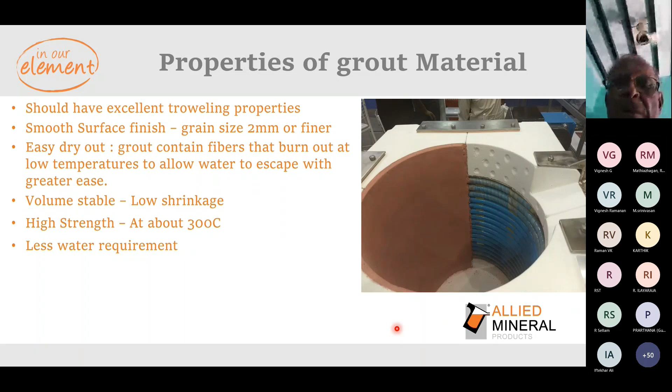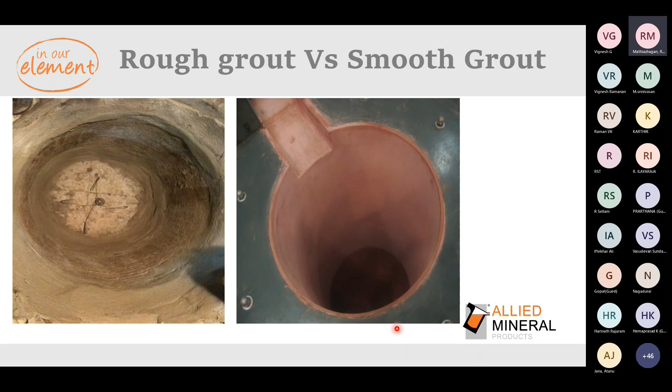When it comes to the dry out of grout, drying of grout is one important step when you try to maximize the refractory lining life. We recommend doing the dry out either by flame or power burner, which is most preferable. Heating through a halogen lamp is not recommended, even though commonly everyone follows this.

So we don't recommend drying grout with a halogen bulb. We recommend following the cycle recommended by the refractory supplier with the help of a thermocouple. This will help remove the complete moisture from the system in a slow phase. The dry out cycle can be designed based upon the size of the furnace and the amount of grout material consumed. Normal recommendation is to raise the temperature till 300 degrees Celsius.

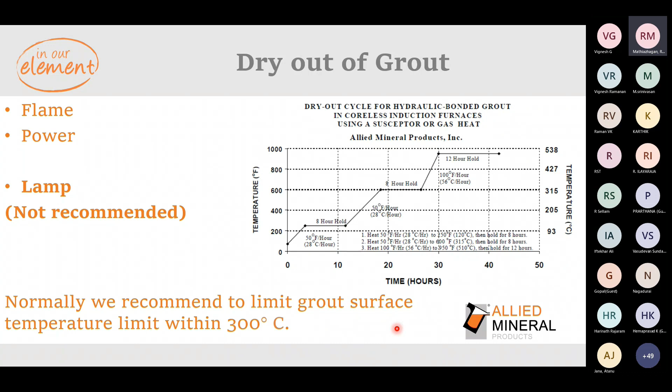So you can see a small graph on the screen, which is a common thing, but we can adjust this. We can frame this based upon your furnace size and the material that has been consumed.

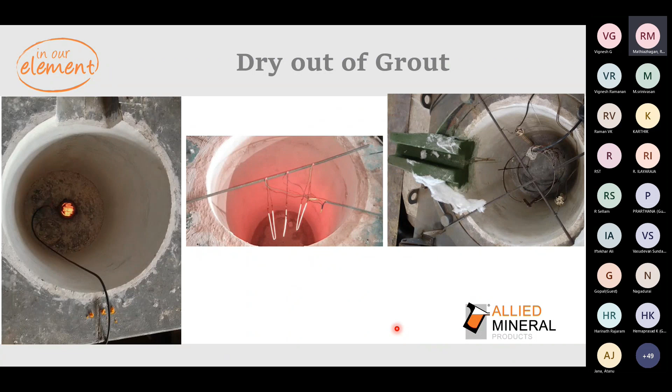So these are some pictures which show how we suggest normally a grout has to be dried out with the filament heaters.

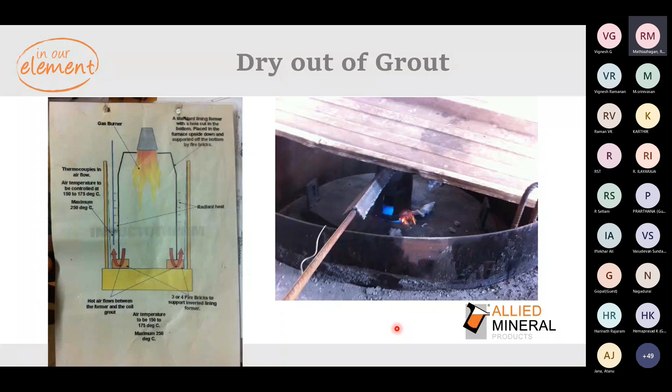So in this slide, we talk about the dry out of a grout through a burner system. As you see in the slide, place the former upside down by placing a brick at the bottom, so the former will be standing over the bricks. Place the burner in such a way that the flame is inside the former and the hot air flows through the bottom and moves upward between the grout and the former. Place a thermocouple through which you can detect the temperature and control it.

Some people go ahead with GLD values also, which is again a good thing. You can record the values before the dry out cycle is started and after the cycle has been done, to correlate the values and proceed with the lining.

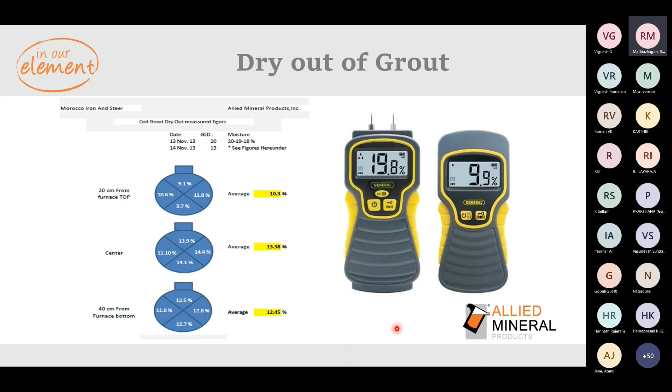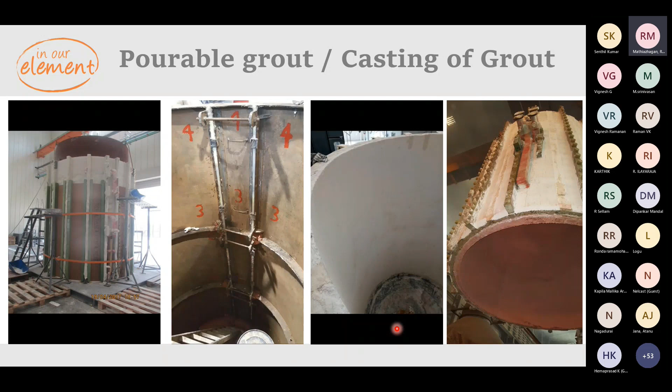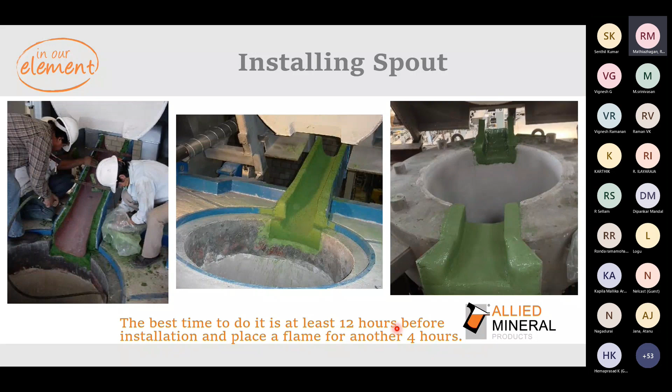Now I'm moving on to spout. We always recommend the spout be done prior to the working lining. This will help the main lining expand and contract with no hindrance. This will reduce the maintenance in that area and avoid metal penetration happening below the spouts.

As I said earlier, if the spout is done after the working lining, when the expansion and contraction of the main working lining happens, there will be a crack between the spout and the main working lining, which paves a way for the metal to penetrate. So always do the spout first.

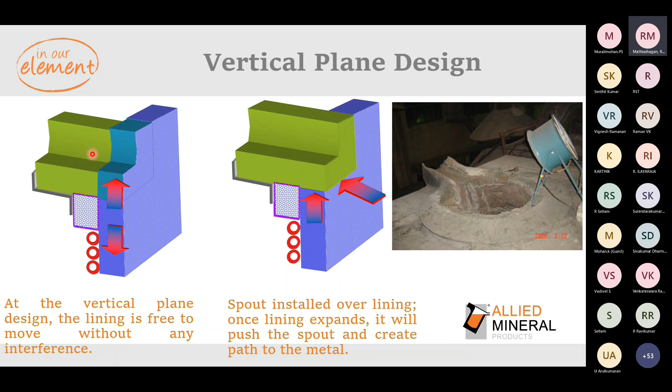So we recommend doing the spout first and then doing the working lining. You can see when we do the spout first and the working lining second, the maintenance is very minimum. We always recommend plastic refractories for the spouts, which has 2% moisture.

So prior to the working lining, we need to remove this moisture and allow the refractory to shrink. We recommend using an external burner, and depending upon the quantity of the refractory being used, the dry out of the spout timing can be scheduled between 2 to 4 hours.

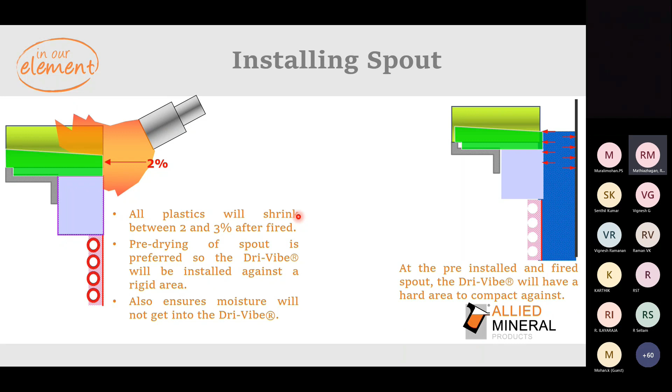Make sure you make vent holes for the moisture to escape easily.

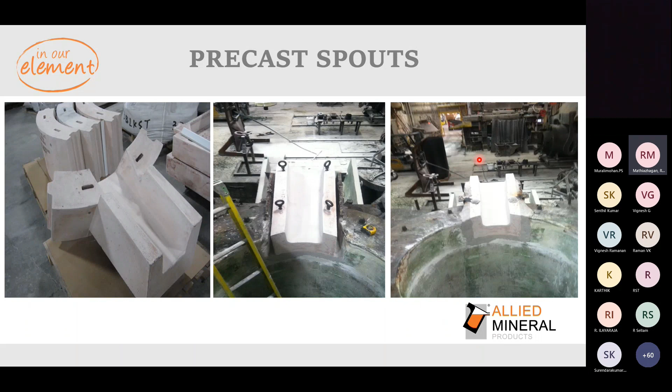Coming to top cap, this is one area where we have seen widely in the market least importance given till date. People normally go with sodium silicate mixed either with the ramming mass or with the sand, and they make the top caps generally, where high maintenance is required and a lot of unsafe operations are happening because metal leaks around that area.

So we talk to the customers in such a way that attention needs to be given in this area also. When we are talking about top cap refractories, it can be either dry, wet, or plastics.

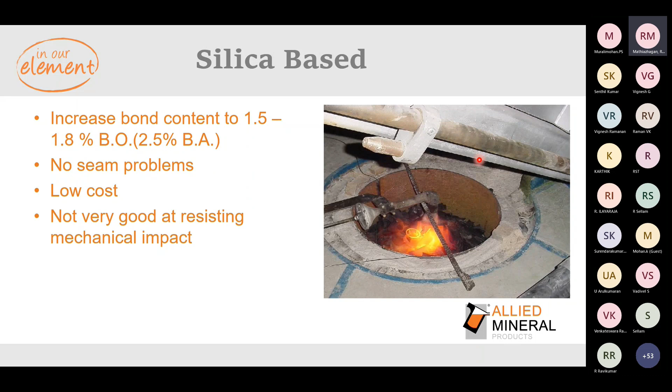For silica, we engage all the above said, like plastics or castables or dry versions. This is one type, silica based, where we increase the bond percentage. For example, if you're using 0.8 or 1% boron oxide for the main working lining, the top caps can be done with 1.5% BO or 1.8% BO, so that this product sinters a little bit at low temperature and gets the strength. This is one more silica based top cap material with extra bond.

We normally recommend a few silica based options on the top to have good volume stability. With the extra bond, under low temperature it sinters very fast and gains strength. Even if you have any mechanical abuse, it can be resistant towards that abuse. And as I said before, it's ideally suitable for silica linings.

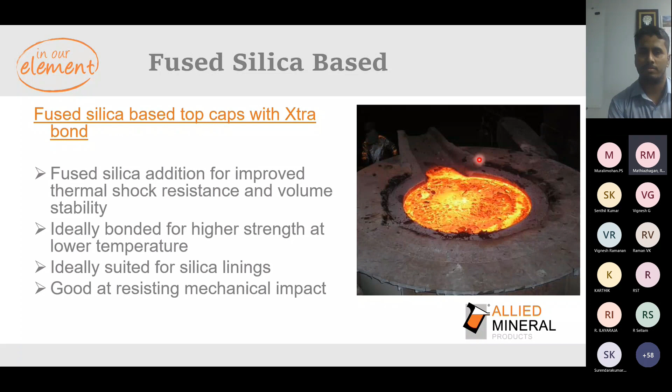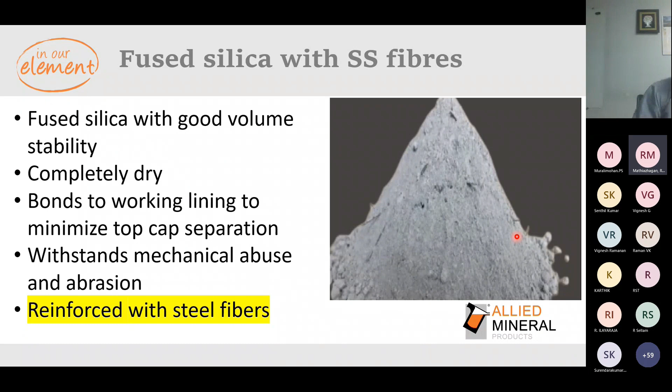All these dry versions minimize the separation between the main working lining and the top cap material. We recommend this product wherever there's more damage to the top cap area. These SS fibers act as needles to give more strength, and it reduces the amount of cracking and damages happening in that area.

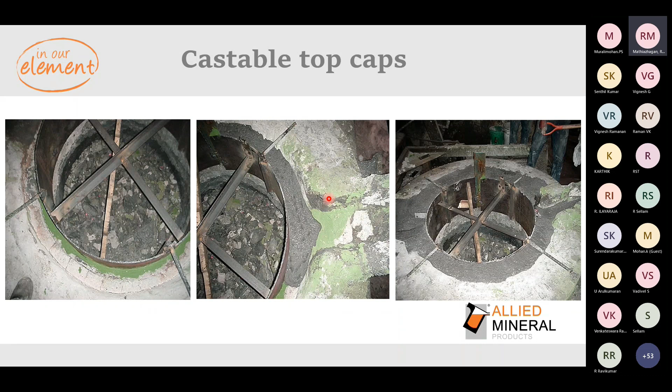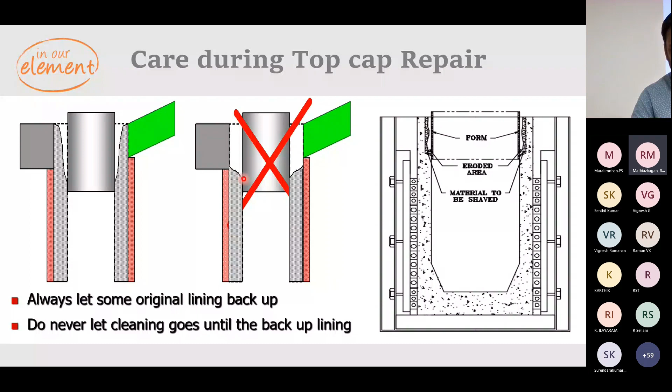Also, try to do the cut in the refractory inclined like this, don't do it on a right angle cut. You should always have the cold face on the upper side and the hot face a little bit on the lower side, then do the patching. Because if any metal penetration happens, the metal will have to travel up and then go towards the coil, so it will take some time. By the time it happens, we can have a GLT detection and we can shut down the furnace. So don't do a right angle cut like this.

These are two different products, two different product lines, and the merging will not always be proper. There will always be a small seam line separation which gives way for metal to penetrate inside. So we always recommend a dry top cap, like fused silica based or normal silica based with high percentage boron oxide, or fused silica based with stainless steel fibers. We ask customers to avoid sodium silicate top caps since they don't have good strength and require a lot of repairs during the campaign.

If you have high mechanical abuse, we can go with ultra low moisture castables as a top cap material. But do this castable lining when the furnace is in warm condition, so the moisture is not absorbed by the dry ramming material at the bottom. Also, whenever using a different top cap material other than dry top cap material, make sure the metal level is always on the main working lining and does not come to the level of the top cap material.

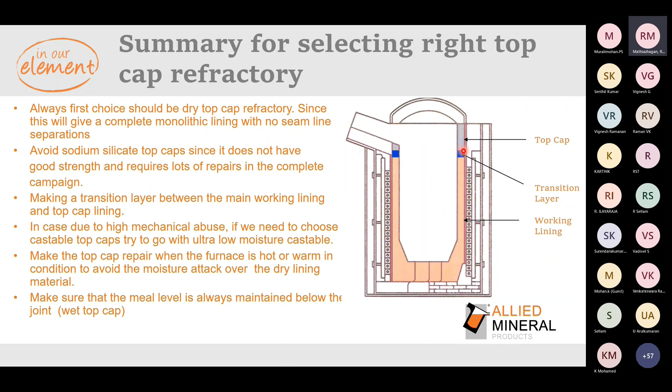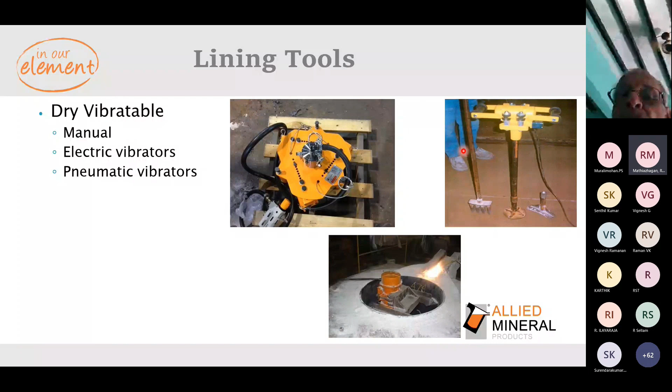Coming to lining tools, lining is normally done either manually or using a pneumatic vibrator or an electrical vibrator. The first picture shows a pneumatic one. The second is a Bosch, operated electrically, but manpower has to be engaged. The third picture, the orange motor, is an electrical vibrating system. But in general nowadays, most foundries are engaging the Jolter, the pneumatic one.

I'd like to bring everyone's attention to operating this tool. First, this tool should be used only for compaction, because I've seen in the market people use this for de-airing also. They don't do any forking - they just fill the material, introduce the vibrator inside, and start the vibration. But this motor is designed only for compaction. So we recommend forking the material for at least 5 minutes for each layer, and then introduce the vibrating motor and start the vibration.

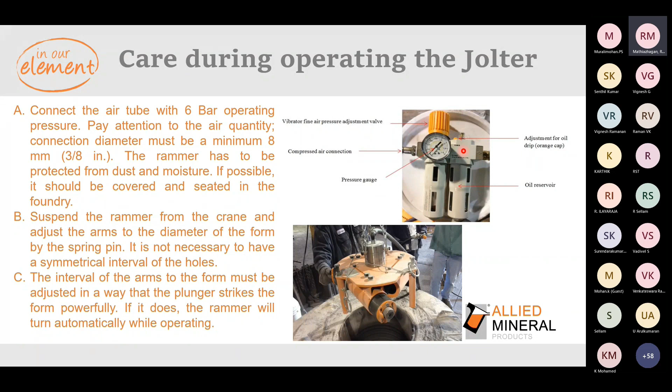Care which has to be taken while using this vibrating system: it should be operated at 6 bar pressure. Pay attention to the air quantity - use a minimum of 8 mm hose for the airflow between the compressed air and the system. The rammer should be dust free, because it has a lot of moving parts, so it should be dust free.

Adjust the arms according to the form diameter. Make sure the vibration is happening properly with a vibro tachometer. Use a vibro tachometer to understand the vibration and make a point to note it down, so that every time you cross check it, and if any deviation is there in the amount of vibration being transferred, you can check your vibrating pneumatic vibrator or jolter.

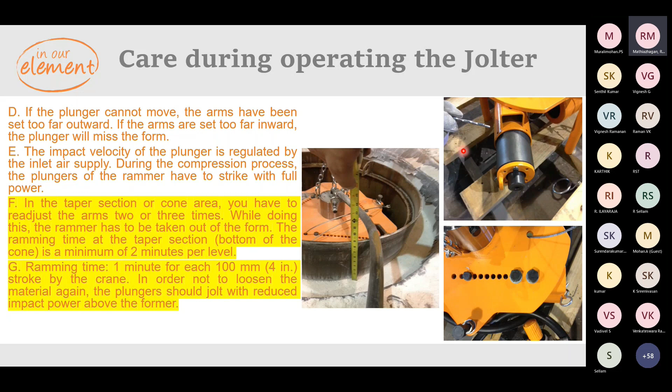In the taper section, ensure the distance between the former and plunger are adjusted properly, and run the vibrator for 2 minutes per level, because normally this has been uplifted by the crane. So at each level you have to do 2 minutes. For sidewall, vibrate for 1 minute for each 100 mm thickness or distance. Ensure we don't over-vibrate - set the level and vibration speed accordingly, to avoid disturbing material which has already been compacted.

So coming to the advancement in silica lining - I don't want to put my trade name, so I generally call it ALGT, which is Advanced Large Grain Technology. This is a new grade of silica in the market. It's not exactly new, it's been there for many years, but still very few customers have a mindset on how this will work.

So I take this opportunity to explain this and its advantages. Normal grain sizing is 4.5 mm to 6 mm, but this product contains 12 mm on average in a bag. There are certain grains which are a bit bigger, but on average it comes to about 12 mm particle size, which is about 60 to 100% larger than the maximum grain size of a traditional silica.

What the increased grain sizing does is reduce the surface area exposed, and this is not only a boron oxide - it's a special binding agent, so that the larger grains are kept on hold during the sintering process. So it has a special binding agent. This new binding agent with the grain sizing gives you a better sintering process and helps in attaining a better hot phase.

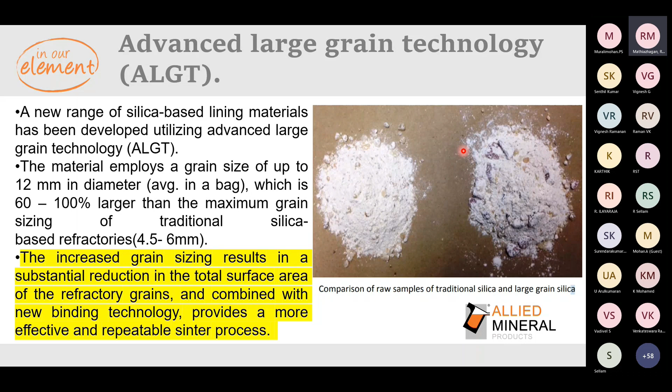So when it comes to the additional benefits, a better packing density is being attained because we had some cases where we removed the former even without introducing any kind of heat. We don't normally recommend it, but there was one customer who did it. The idea of sharing this is that this product compacts so well that you can remove the former also, but normally it's not much recommended because it's unsafe.

This product has been designed to be suitable for liquid sintering, and because of the grain sizing and grain distribution we have, it has improved abrasion resistance, especially in areas like taper section or cone sections where you find a lot of elephant foot erosion.

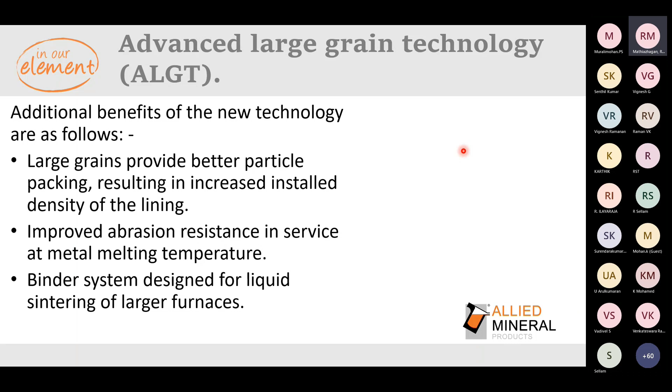So let's talk about sintering. Normally people tend to go with a kilowatt basis, but we always say that refractory understands only temperature and time. So try to follow the sintering with thermocouples and not by kilowatt, which is power. A K-type thermocouple does not cost you much, and when you remove this thermocouple at 1000 degrees Celsius, 1000 degrees Celsius is the critical area for the sintering of silica. These thermocouples can be used on a long-term basis if you're not going to damage them by keeping them in for too long.

So when it comes to types of sintering, there are two types: solid sintering and liquid sintering.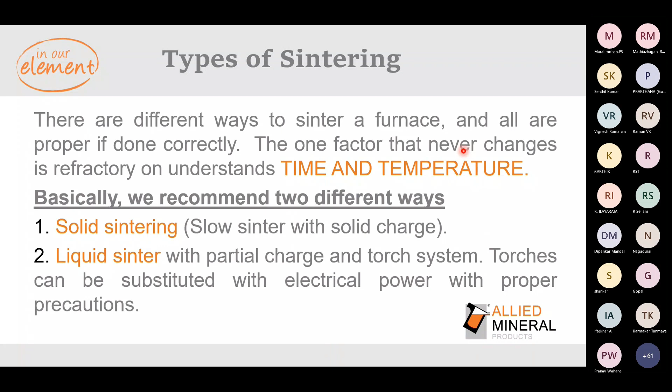If you talk about solid sintering, everyone does the same operation: the furnace is charged with scrap, and the sintering is done through power. Our recommendation is to rise between 83 to 100 degrees Celsius per hour, depending upon the furnace size. Hold at 550 degrees Celsius for 30 minutes, then rise till 900 degrees Celsius and hold for 1 hour. Then you can increase the power, melt the scrap, and take it to 50 degrees Celsius above your tap temperature, which is normally between 1550 to 1600 degrees Celsius, and hold there for 1 to 2 hours, depending upon your furnace size.

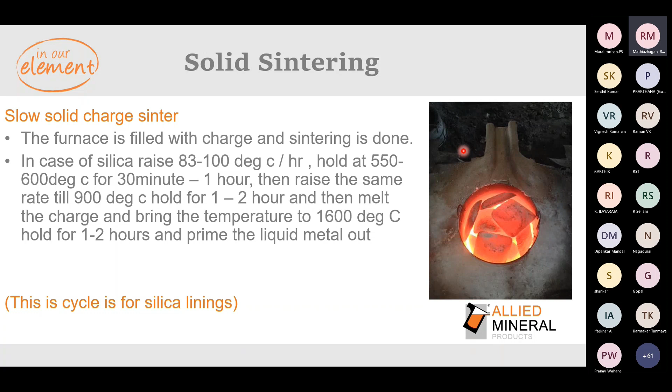That cycle is normally used for silica linings, but when it comes to alumina linings for steel melting applications, we suggest going between 200 to 220 degrees Celsius per hour, and then you can directly shoot out to 1600 degrees Celsius and hold. In case of larger capacity crucibles, you can hold around 870 or 900 degrees Celsius for 1 hour.

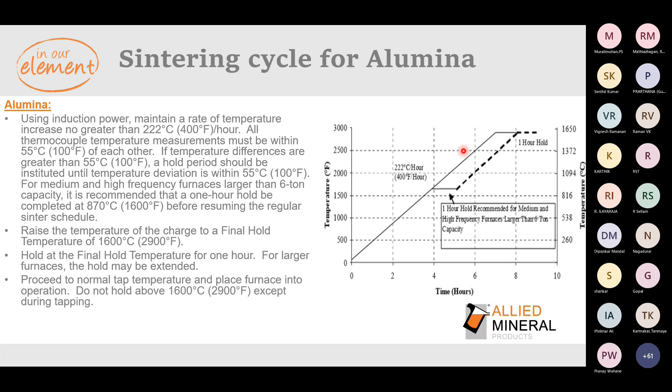When it comes to liquid sintering, this is one of the best sintering practices, but many people are concerned about engaging this into their operations. It's very safe if you do it in a proper manner, and it gives a longer lining life for your refractories. We recommend loading 1/3 of clean scrap inside the form with the help of a gas torch. Raise the temperature to 1100 degrees Celsius at a rate of 150 degrees Celsius per hour, and hold the furnace for 2 hours. Prime the liquid metal at 1550 degrees Celsius from the other furnace, so you get a clean liquid metal from that furnace, which you can then bring into this sintering furnace.

After tapping, switch off the furnace for 15 to 20 minutes, so there's no much turbulence because of the power. Then slowly raise the temperature, since there'll be a drop in temperature, to 1550 to 1600 degrees Celsius and hold for 2 hours. As I said before, we recommend this liquid sintering since it gives a clean sintering to your lining with no slag attack to the main working lining or no saturation in the initial lining.

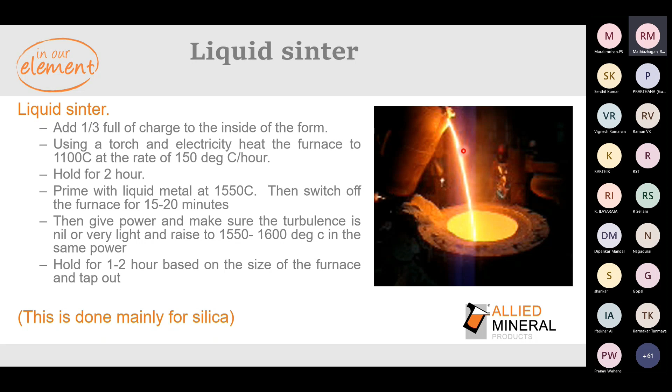So when it comes to advantages and disadvantages of solid sintering: advantages are that anytime we can go slow and consistent with the temperature, the refractory will perform consistently, with less chances for rapid failure during sintering. But disadvantages include high energy use, long downtime, need to use very clean scrap free from oxides and sand, and it's easier to cause bridging. Sometimes there's a possibility of losing the form before the molten metal is introduced, and this leads to exposure of the lining to the metal with no pressure.

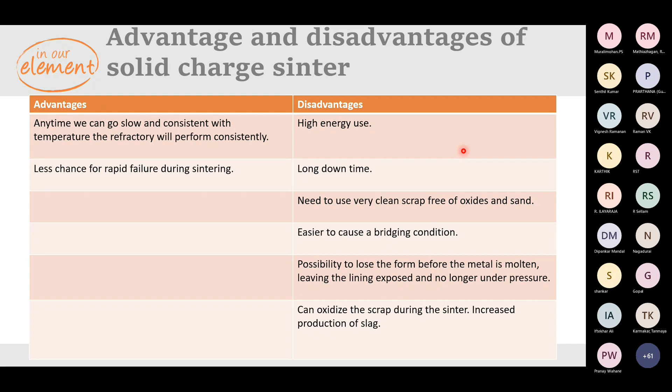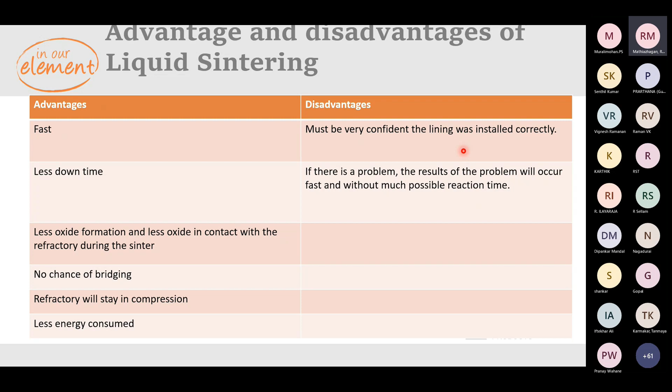When it comes to advantages and disadvantages of liquid sintering: it's fast, less downtime, less oxide formation, and less oxide actually in contact with the refractory during the sintering. No chances of bridging, refractory will stay in compression, and less energy is consumed. But when you talk about disadvantages, as I said before, you must be very confident, and the process has to be taken with utmost care.

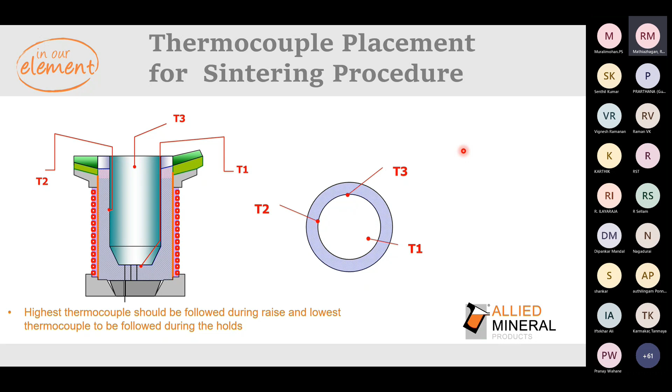So as I said before, use thermocouples during the sintering so that you can monitor the temperature, because there's always a concern when I go to customer places about this. What we recommend is to run a couple of cycles with the thermocouples, note down the temperature versus kilowatt, and frame a chart. Then follow the kilowatt readings, and have a periodical check every 6 months or 1 year to verify whether what you're following is right or wrong, with the help of thermocouples.

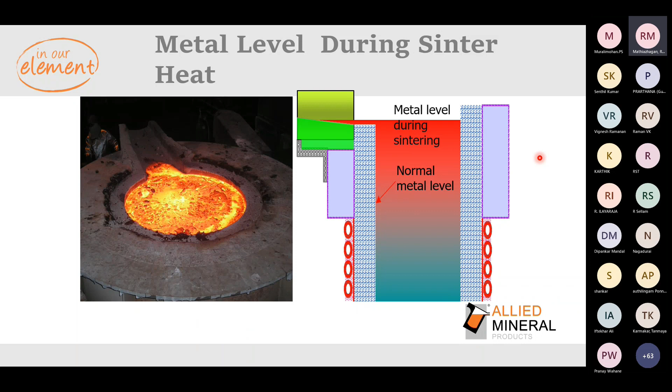When it comes to sintering parameters, care has to be taken regarding changes in the charge density and charge makeup. Make sure the charge is dense, clean, oil-free, rust-free, with no borings. Make sure you follow the right cycles with the holds wherever recommended. Like I said, for silica, 550 to 600 degrees Celsius, or 900 to 1000 degrees Celsius, and then the final hold.

Minimize the power input as the charge begins to melt. No alloy additions or carbon additions until 75% of the furnace is full. Don't add steel charge until 50% molten metal during the sintering heat, which we'll be talking about why later in the presentation.

Make sure you have a proper thickness for the form. Normally we recommend 6 mm as a starting thickness, and when the furnace goes bigger, like 10 ton or 12 ton, we go up to 8 mm. We don't recommend 3 mm because the refractory always has to be in compression. A 3 mm form has a high possibility of getting cut due to some kind of arcing, and if the former is cut, the refractory is not under compression, and in that area you can see a kind of spall. So we always recommend having a proper thickness of the form.

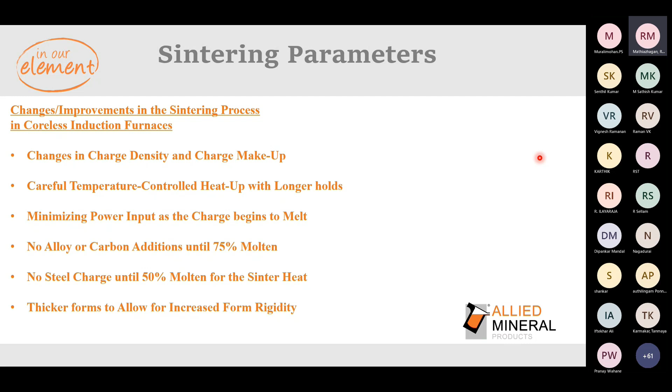Coming to common lining problems: one common lining problem is carbon saturation. If you see this picture, this is the hot face, and on the cold face side you can see a black spot. In the picture below, the same thing — the hot face on this side has a middle portion which is white, and on the cold face you can see a black portion. This is all because of carbon deposition.

Carbon deposition starts when the temperature, as it goes near the coil, is always less. Below 500 degrees Celsius, the carbon deposition starts, and it is aided by the presence of rusty scraps and oil in the borings or oil in the scrap. Moisture is also one more cause for carbon saturation. As it grows and grows, GLD tripping happens due to earth leaks, and intercoil arcing happens.

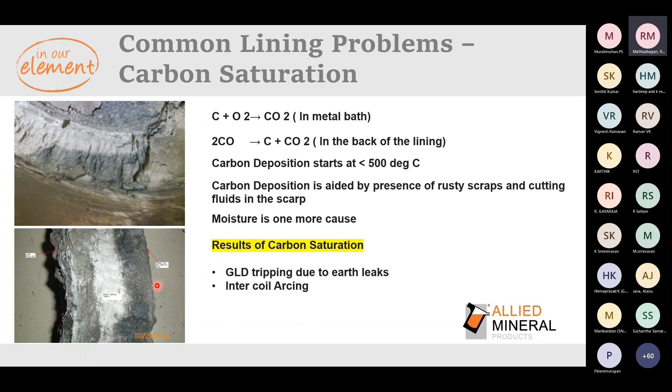In case you come across this in your foundry, to understand whether it's carbon or not, you can easily test it in your lab by doing an LOI test, that is loss on ignition test. Take this black refractory, put it in your furnace, and take the temperature above 1050 degrees Celsius. The weight difference between the initial charge and the final weight after heating to 1050 indicates the carbon content. Also, the silica turns back white again — all the carbon evaporates and goes out, and the refractory looks white again. If you see this picture, that indicates the same. So that's an easy check which can be done even by you at your own lab.

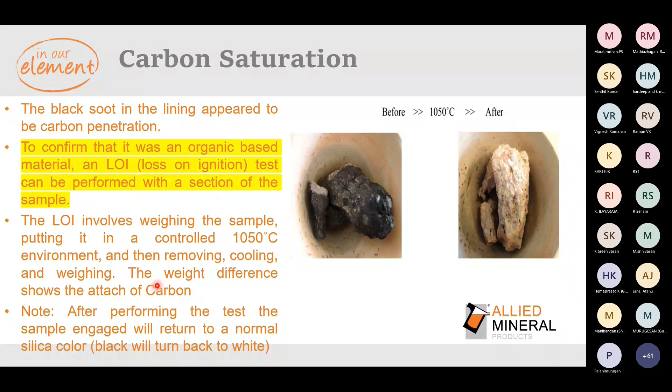Coming to the solution, how to eliminate this issue. We need to first ensure a proper installation, that is densification of the lining and hot face formation, following the right procedures for the sintering.

When it comes to the other part, make sure the grout has been dried out, and the other structural components like bottom blocks and top blocks are dried completely, because all these contain moisture. When the furnace is new, there's a lot of possibility that more moisture is in the system, so make sure a proper dry out cycle is followed to eliminate all this moisture before the lining is started.

Use only oil-free or rust-free scrap. Don't add carbon until the liquid metal is 50%, or at least 1/3 of the level. Follow the right sintering procedure for good hot face formation. As I said before, liquid sintering is preferable.

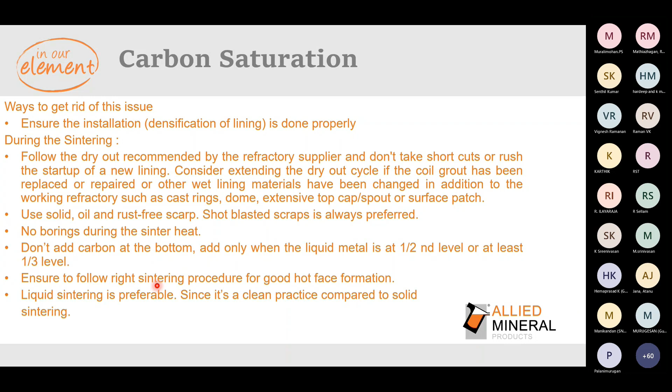Again, I'm talking about the same point. One more thing I'd like to add is to try to avoid adding fine grade carbon. Also, if you're trying to use oil scraps or oil borings, try to burn out the oil externally before it's introduced inside the furnace.

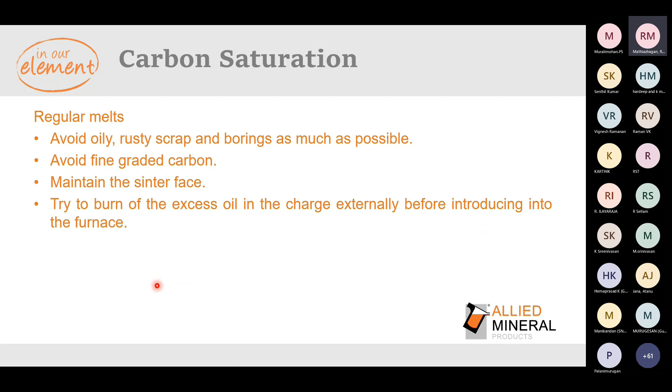Coming to the erosion part, erosion normally happens because of two reasons: chemical and mechanical. Chemical is because of metal chemistry attack and slag chemistry attack. Mechanical is because of mechanical abuse and stirring action.

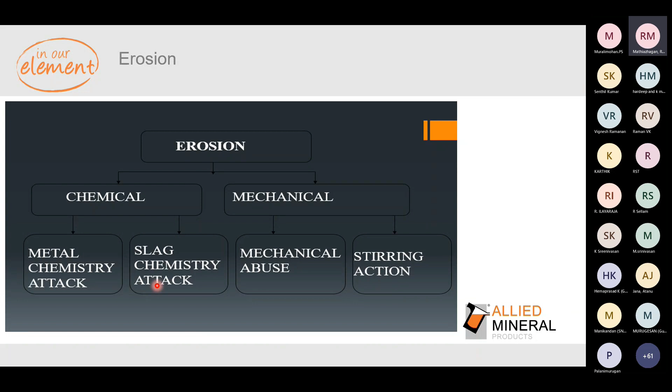When it comes to erosion, carbon silicon equilibrium plays a major role at a set temperature. If the carbon increases in the liquid metal and the silicon percentage decreases at a set temperature range, the reaction toward the silica lining is going to be strong, and the carbon is going to pull out the silica from the main working lining and erode it.

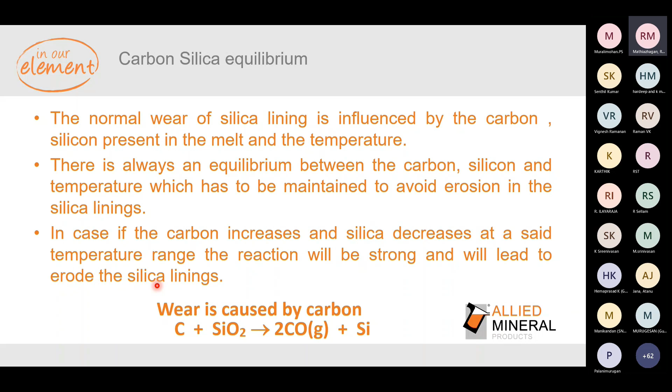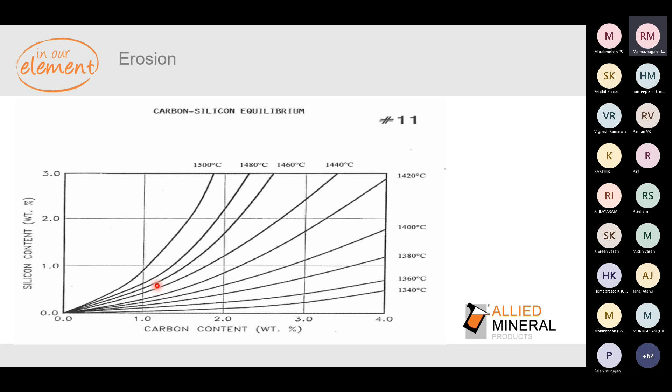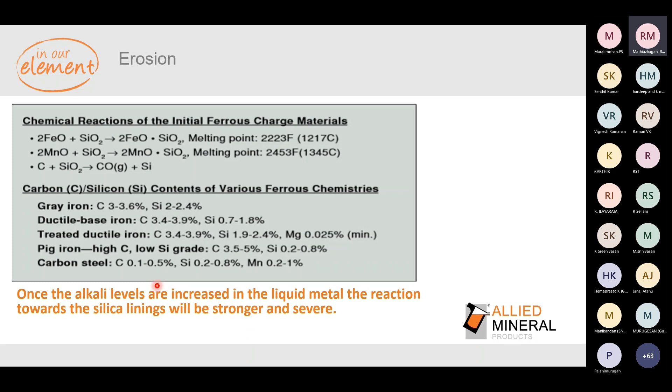Slag is one reason, and understanding slag is important to minimize erosion. Slag formed during the melting process comes in first contact with the refractory. Based on the chemistry, it has an effect over the lining, either in the form of erosion or in the form of buildup. Slag is due to iron oxide present in the scrap, and impurities in the scrap.

Like cupola slag, which contains CaO, scrap with mold sand. We are talking about deslaggers, which are like slag coagulants, which also contribute to erosion, because these slag coagulants contain a lot of elements like MnO, Al2O3, Fe2O3, and other alkalis, which have low melting points, which in turn leads to the formation of oxides, causing an attack over the lining.

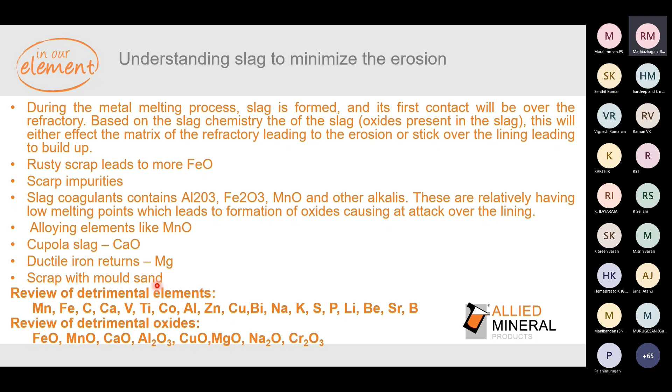So we're coming to understand iron oxide, because this is one thing we always talk about with our customers, as with technologies growing up, automatic shaker systems have come into play for charging furnaces. These shaker systems are so strong that they segregate your rust and the scrap. Because of the vibration, whenever you try to charge the furnace, the iron oxide enters the furnace first, along with the scrap.

It gets deposited on the floor and on the side walls of the linings, and the melting operation starts. The liquid metal gets saturated with the iron oxide, and it generates a lot of high fluid slag, which easily enters into the working lining.

And when the lining is new and fresh, there's a high chance of this, because the lining is like a honeycomb, so it tries to suck up the oxides and saturates very fast. So what happens is this saturation lowers the melting point of silica and erodes the lining pretty fast.

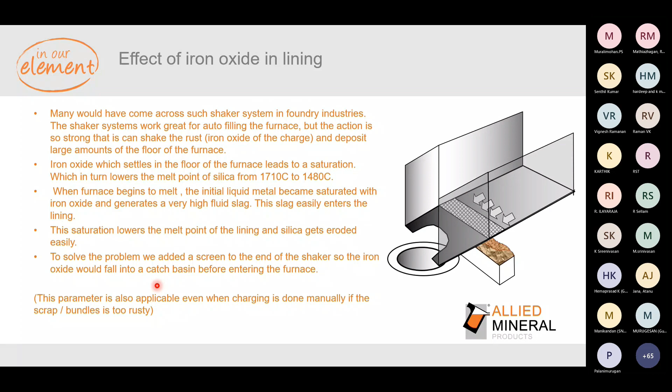Coming to the charging practice, we recommend charging the returns first, followed by pig iron and steel. Any additives such as carbon or Mn should be added only after 1/3 of the molten metal is formed, or at least 50%. 50% is the recommendation, or otherwise at least 1/3.

When adding in the freeboard area, that is the top block area, please take care while adding it. Make sure the charge is getting in properly, to avoid any kind of bridging or superheating at the bottom. In case you have heel metal, reduce the power and charge the furnace back as soon as possible.

To tackle elephant foot erosion, with my 14 years of experience, I have seen a straight form being given by the OEMs as regular practice, which we then convert into a taper section. But even the taper section was not helping out on a longer run to avoid elephant foot erosion.

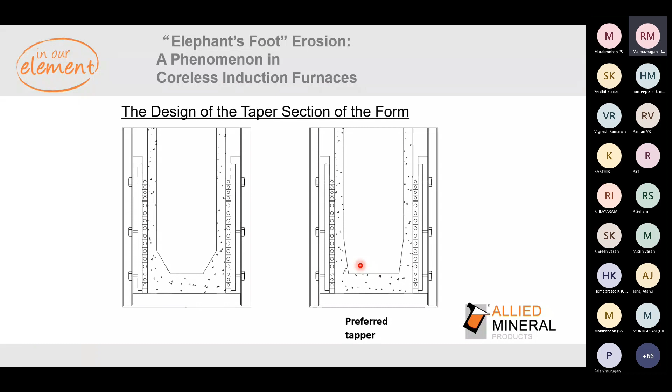Later on, it was found that this taper helps a lot, because it helps you easily install the refractory with proper densification, and it helps out in the long run for elephant foot erosion. So this is one preferred taper when you design a form to avoid any elephant foot erosion.

Coming to finning - finning is metal penetration in the lining, because of cracking. Cracking can be either horizontal, vertical, or random. Horizontal cracks are hard to seal, and it's mainly because of lamination or the lining getting hung up. Lamination is related to installation.

For example, you do manual ramming, fork it, do compaction, and before forking, if you're going to add refractory, there's always lamination, and it can be easily identified when you break the lining, because around the complete circumference of the furnace, the metal will be sitting like a washer. So it's called lamination.

When it comes to lining hang up, it's mainly because, as discussed about grout, the grout has to be as smooth as possible. If the grout is not smooth, and if you're going to do a lot of repairs to your grout...

As discussed about grout, the grout has to be as smooth as possible. We have to minimize the number of repairs we do to the grout. The reason is, as long as you increase the amount of repairs to the grout, it's not going to be smooth.

When the lining is under hot condition, when you heat it up, it expands. And when you cool it down, it does not contract in the same fashion. Wherever there's a projection in the grout, these projections will not allow the grout to settle down smoothly, and it creates horizontal cracks, which are very hard to seal up, with a high possibility of metal penetrating those cracks.

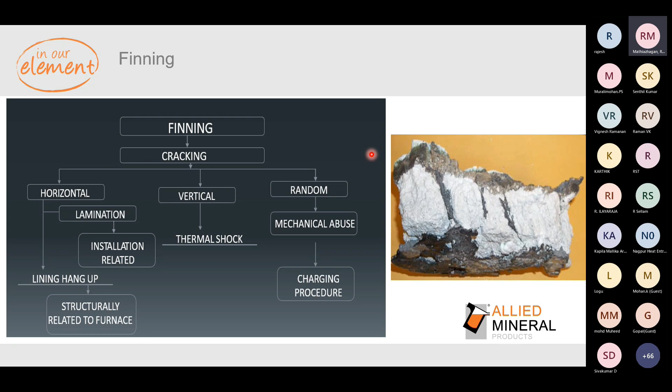We normally call this structural related, so we need to take care of it. Vertical cracks, thermal cracks, are very easy to seal up if you follow a proper cold start procedure. Random cracks are due to mechanical abuse, because of the way we charge the furnace, or any unbalancing in your hydraulics or structural things - otherwise random cracks will not happen. Random cracks are very hard to seal up, and can also lead to metal penetration issues.

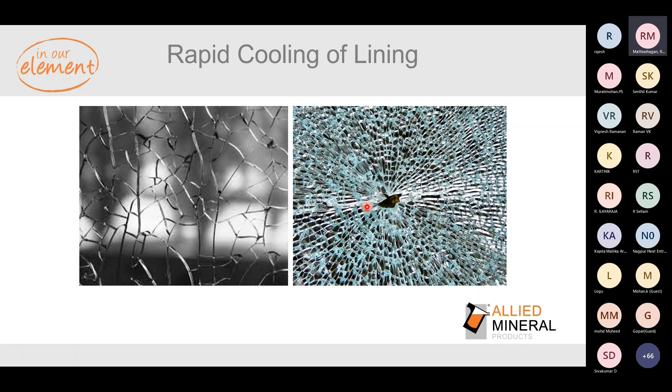This practice has not still been widely followed, but we keep recommending it to our customers, and try to educate them how important rapid cooling is for lining. This helps minimize large cracks and creates lots of smaller cracks, as shown in the picture. These will easily seal up if you follow a proper cold start procedure recommended by the refractory supplier with the help of thermocouples. Slow cooling will always have fewer cracks, but wider cracks, which will be hard to seal up.

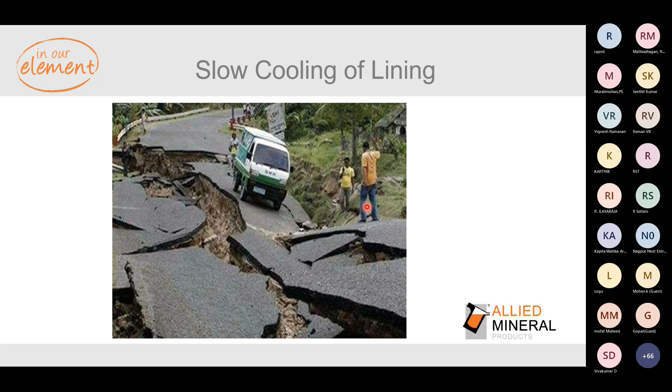Traditionally, we are following slow cooling. Some people put charge also inside the furnace, which is not recommended. If you want to do a slow cooling, just empty the liquid metal out, put a blanket on top, and let it cool, rather than putting any charge or scrap inside the furnace. This will help you a lot.

Because of that pressure, you can have horizontal cracks wherever the stress is created. So break those areas and then put compressed air or a fan on one side, so air flows on one side and goes out the other side.

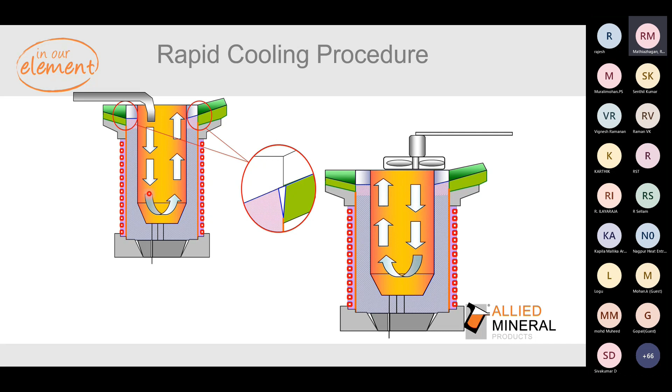Coming to cold start procedure. Now you have done a rapid cooling or a slow cooling, but when the furnace is supposed to be restarted again, we need to follow a proper cold start procedure. This is one of the areas where more attention is required for better lining life.

Normally, every foundryman follows a slow start after a cool down of the furnace, which is not required. Raise the power so the charge can be red hot. You can raise it as fast as possible, but make sure the charge is in red hot condition, and the lining is red hot in condition, while taking care that the metal should not melt.

At that stage, hold for 1 to 2 hours, depending on the size of the furnace. During this hold, refractory expands and gets sealed. This is the important stage, because you need to allow the refractory to expand.

If you do a slow start, you think you're giving a slow start, but you're not giving a holding wherever required, and then you try to melt—this will allow the metal to penetrate into whatever cracks were developed during the cooling process.

So holding is important. Hold for 1 or 2 hours at red hot condition for the refractory to expand and seal up, to avoid any kind of finning happening.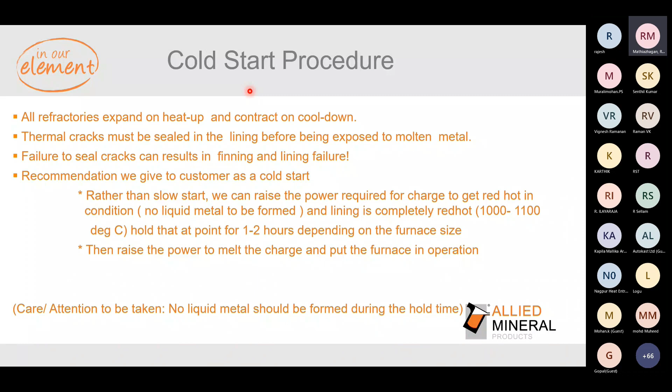Some people do this to minimize cracking: they always keep a torch or burner on to keep the lining hot, and keep the furnace closed whenever possible, minimizing tapping and charging time. As I said, forced cooling is what we recommend, and cold start procedure after extended downtime.

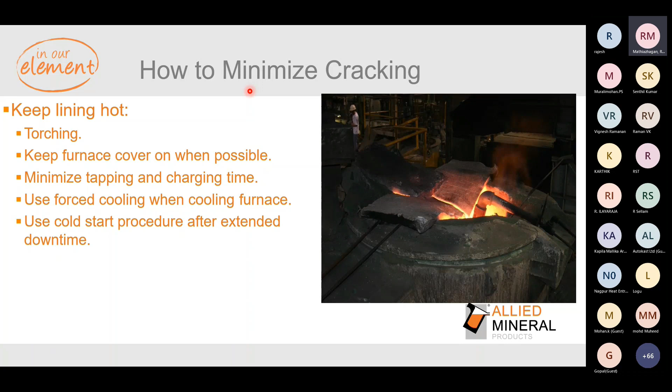Coming to superheating.

Superheating can be because of bridging or trapped metal within the refractory cross section, or superheating of the metal bath because of poor temperature control.

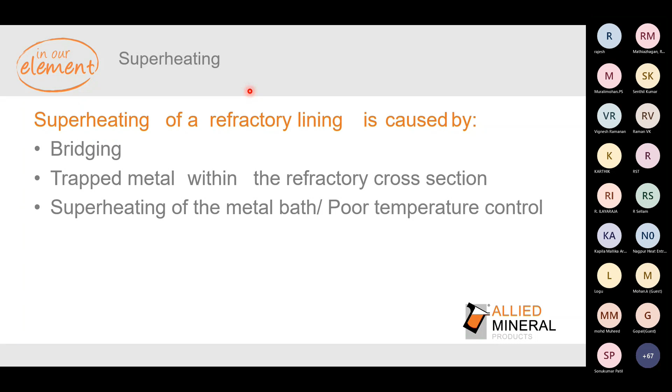If improper charge or scrap is done during the charging practice, the huge scrap will not allow the smaller scraps to get in, and there'll be a lot of hangups. The bottom metal will already be getting the power and will start to melt. Since we are not sure about the melting operation and the charge is not getting in, or there's no contact between the charge and the scrap, this leads to superheating, and the metal will run out wherever the silica gets melted.

We always say proper slagging is a must. Do the deslagging properly, and then try to charge the furnace, making sure there's always contact between the liquid metal and the scrap, so that we can avoid superheating.

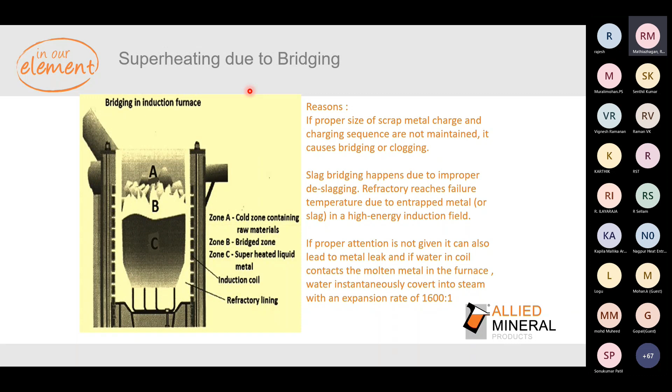So these are some pictures. Because silica melts, you can see through this picture that we can't see any kind of grains. It looks glassy, and it's completely like one monolithic structure.

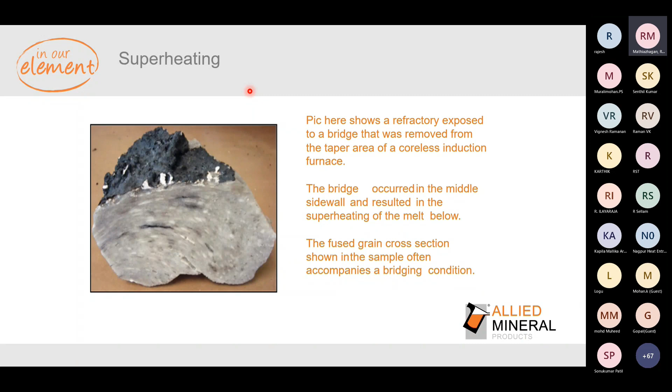So spalling, it's because of a piece of refractory falling off from the hot face or the bottom. It can be because of steam spalling, mechanical spalling, differential expansion, pinch, or thermal spalling.

Steam spalling is mainly due to steam generation because of moisture. As said before, the moisture in the system has to be removed properly before the working lining is done. So we recommend you follow the GLD values or moisture meter values to ensure complete moisture has been removed from the system. Normally it's rarely seen in coreless furnaces, but it's largely seen in ladles, pressure pours, and tundishes where we engage with castables.

So that is one thing. Mechanical spalling is because of mechanical abuse.

When it comes to differential spalling, it's because of saturation. To avoid saturation, as said earlier, we talked about going with liquid sintering, proper selection of refractories, and proper sintering practices to shut the porosity as much as possible. Because the lining is like a honeycomb or a sponge, it tries to pull out all the slag or impurities along with the metal into it and keep it there. So when power is fed more and more for the melting operations, whatever saturation happened in the lining also travels towards the coil, leading to GLDs.

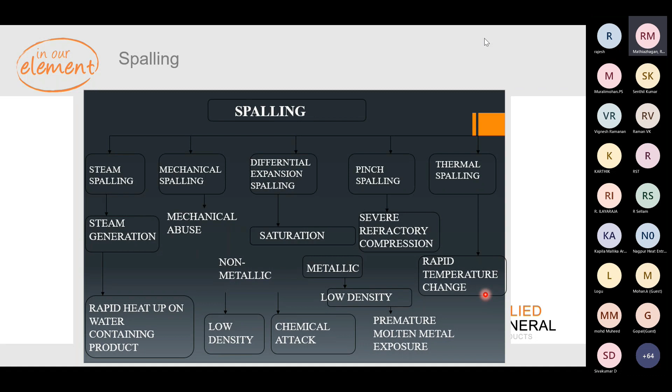And thermal spalling is because of rapid temperature change during the operation. So these are some pictures which show spalling.

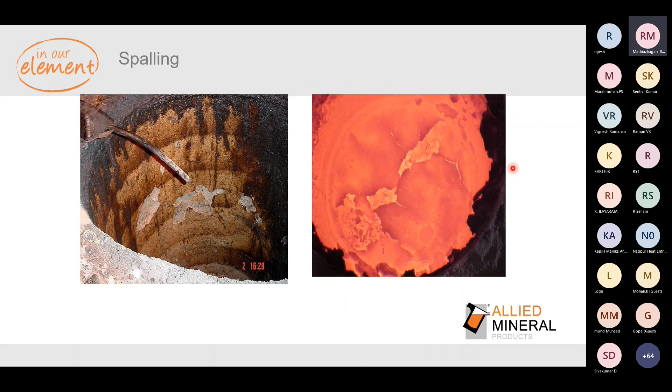In this picture you can see during rapid cooling operations they pointed air towards the working lining, and because of that sudden temperature difference, spalling happens. And here you can see pinch spalling at the bottom.

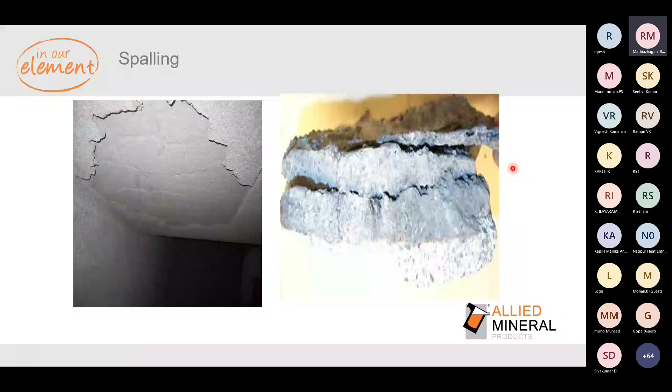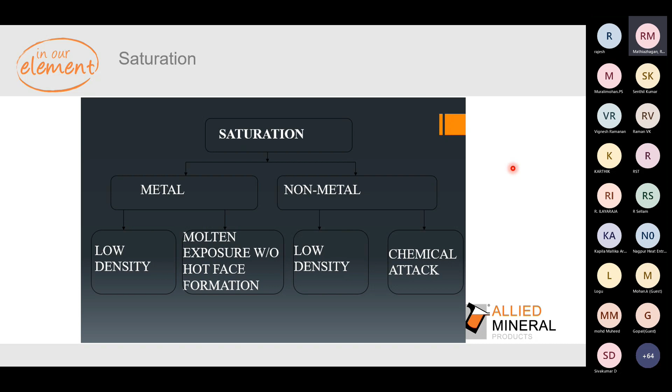Buildup is because of oxide formation, metallic oxides adhering to the furnace working lining. It can be oxidation of molten metal and contaminations from the charge into the furnace. This will reduce the volume of your metal, and because of that the power rating is also increased, and then you tend to break the lining.

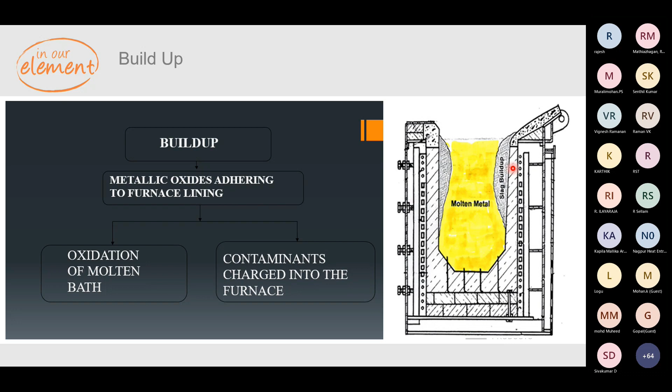So in a nutshell, for a better refractory lining life in your furnaces, inspect the furnace completely, both mechanically and electrically, and ensure the furnace is ready for lining. Select the right refractory for your operation, depending upon what you melt.

Normally for iron melting operations, nothing much changes. It is only silica because that is a cost-effective solution, but the boron oxide percentage can vary from 0.6 to 1% depending upon your operation. And if the furnace is going to be put into a lot of thermal cycling, fused silica is one solution you can look into. There are a lot of grades in fused silica too, ranging from 15% to 40%. So depending on your cost viability, we can choose fused silica.

That comes under selection of the right refractory for your operation. Ensure lining tools are checked and ready to use. Follow the lining and sintering procedure recommended by the refractory manufacturer and supplier. Charge the furnace with the right charge, as we discussed, like returns first and pig iron and steel next, to avoid any initial saturation and erosion happening to the lining.

After the initial sintering, try to complete at least 5 heats with no stop to the furnace, because there are people who shut down the furnace immediately due to production capacities, which is not recommended because the hot face formation is not yet completely matured. So try to take at least 5 heats before you shut down a furnace, and avoid dirty charge and oil-free charge during regular operations.

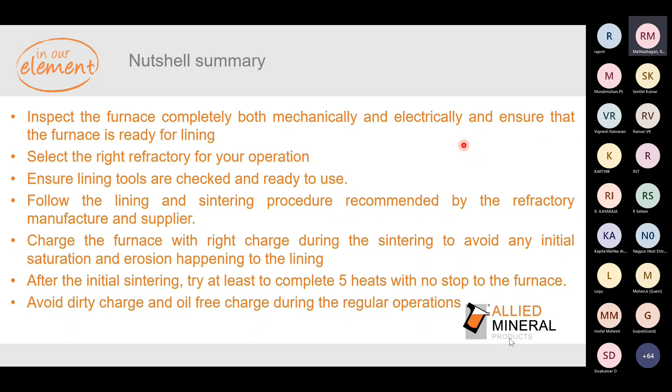Normally, whenever you shut down and restart it, ensure the joint between the spout and the working lining is good enough. If you find any small cracks, clean it up, make a V notch, and put the plastic refractory again and seal it up to avoid any metal penetration through that joint. Follow the right cold start procedure after cooling down the furnace to seal up all the cracks and avoid finning.

After the last step, when the furnace is going to be put into cool down, try to knock down the slag sticking over the joint area of the spout and the working lining, so the lining contracts smoothly with no hindrance.

Try to make the top cap only to the level of the top block and melt below the top block level. Because if you make any kind of heap, this is not going to sustain for a long period of time.

If you make a heap with sodium silicate, it cracks easily, and this can lead to unsafe operations. Since sodium silicate does not have the strength, it always stays there as a cracked one.

It also gets into your liquid metal while tilting the furnace, and it can create inclusions in your castings. To avoid this, choose a proper top cap refractory and try to maintain it to the top block level.